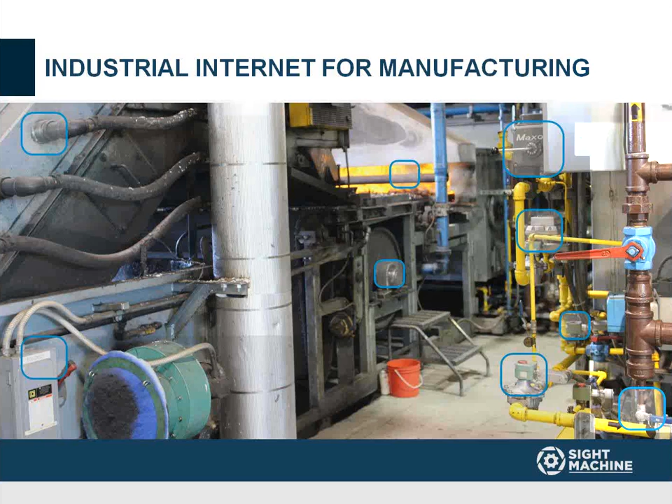That advancing wave of data producing technology has put us on the cusp of the next manufacturing revolution. And I think it's helpful to take a moment here and review how we got to where we are today. The first industrial revolution was about the rise of factories and innovation around standardized, replaceable parts. We all remember that from our grade school history books.

After that came distribution systems with the railroads and the rise of consumerization with electrification of homes and plants. And the population moved to industrial cities around the world. After that, of course, Henry Ford - he's well known as the pioneer in the next major wave, the assembly line, which was a great process improvement.

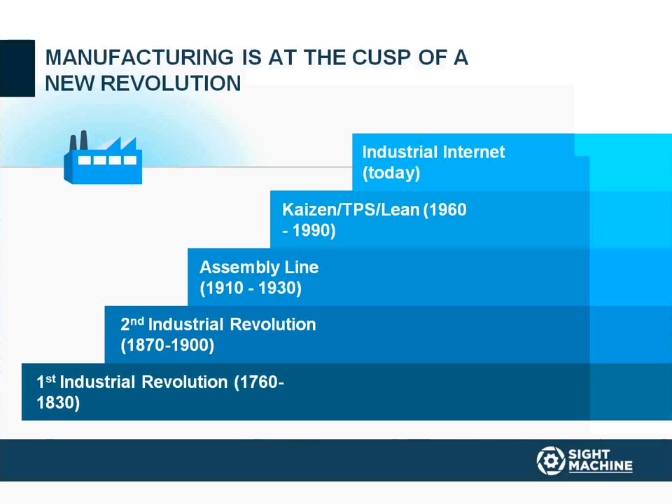And for the next 75 years or so, all of the great changes in manufacturing have come from process improvements, including the rise of lean manufacturing or the Toyota production system, and quality initiatives like TQM back in the 80s and Six Sigma more recently. The Toyota production system and Six Sigma in particular drove greater interest in the systematic use of technology and information from the factory floor, which in turn drove investments in the technology on the floor to track that information. And that's how we got to where we are today, in the rise of the industrial internet.

You might be asking yourself, if manufacturers have been investing in automation and this technology for 10 or 20 years, why is this so much in the news right now? There's a pretty good answer for that. Until the last few years, the technology and tools needed to make sense of all of this data have not really been available to most people.

Recently, however, there have been several advances in information technology that have finally brought all of this together. These advances include a brand new branch of data science, generally called big data. I'm sure you've seen this in articles and presentations, offering new tools for correlating and analyzing multiple types of data. You'll hear us talk both about structured data - that's the kind that's easily tagged and fits into a standardized database - and unstructured data, that's the kind that doesn't have a standard row-column database format and thus doesn't fit into traditional systems very well. That's things like paragraphs of text, images, etc.

Coupling these advances with the rise of standards for machine communication protocols, the ongoing investments in automation and sensors, and the rise in particular of inexpensive storage and computing power via cloud-based systems - that's how we got where we are. This is why the pieces coming together have given rise to the industrial internet, in the situation we find ourselves in today.

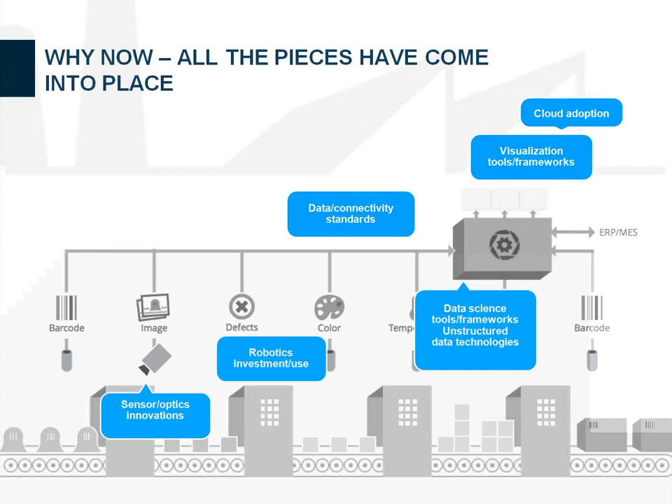And it's a good thing, too, that all of these have come together, because market forces have really fundamentally changed the game in manufacturing. All of us have heard this many times before, but looking back over the last 10 to 15 years, we see much higher quality standards, both from consumers and from our customers in our supply chain. Tighter regulatory environments, especially in automotive and medical device, and more recently in food processing, and the reporting requirements that go along with it.

There's been a very dynamic labor situation both in the U.S. and globally. Companies that offshored production for labor force costs are rethinking those decisions because costs have risen so quickly in places like China. We've seen faster cycle times for new products. Going back to automotive, I think when I was a kid, the standard refresh cycle for new automotive designs was in the 6 to 7 year time range. We're now seeing 4 years as a standard, and getting down to 3 years in some cases.

And even emerging trends like the mass customization of products are all pushing harder and harder on manufacturers. If you're not familiar with mass customization, take a look at the Nike website. This is kind of a cool thing. You can start with a basic shoe that they manufacture, and you can customize its look, anything you want, colors, patterns, etc. And in a few weeks, Nike's going to send you a bespoke shoe just to your specifications, your size, your colors, everything. Tesla's doing the same thing with cars.

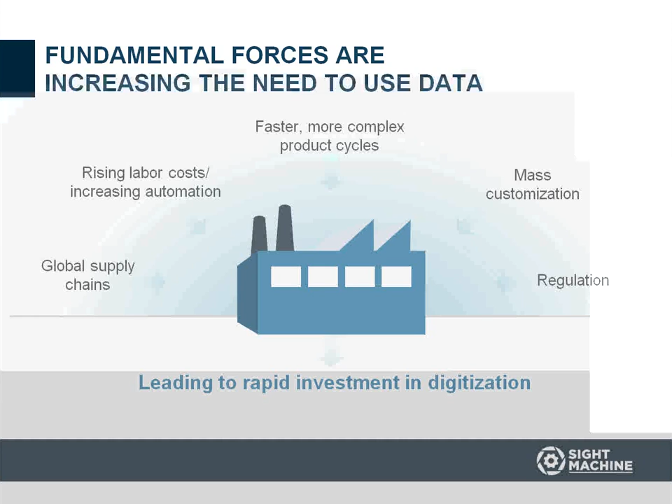All of these new pressures, all of this complexity, all land in the same place: the factory floor. Trends like the ones I just talked about are demanding new processes and new technologies and access to the data that's being produced on the shop floor. And they are really some of the key drivers for the increasing spend on new digital manufacturing technologies and manufacturing intelligence technologies as well.

I love this message, this acronym DRIP, Data Rich Information Poor, because we see this problem so often when we're out talking to manufacturers. They all seem to have the same sort of problems. They're producing data, they know they're producing it, and sometimes they're collecting it and collating it, but not in any standardized fashion. What we hear from them, and this is such a typical story, is that when they need to do some sort of analysis or report, they send a manufacturing engineer down to the plant with a thumb drive.

And he goes from system to system, collecting the data that's there, brings it back to his desk, imports it all into an Excel file, and spends a couple of days organizing it, sorting it, and creating some sort of report from it, which he then usually distributes via email. I don't think anybody's going to call that a best practice. Very few people trust that data. It's certainly not timely data, and it's not an easily replicable process. So clearly not a best practice in manufacturing.

So this DRIP acronym is a really great identifier, I think, for the problem. This lack of insight caused by being data rich and information poor creates all kinds of problems, right? So we've seen a fastener company doing destructive testing and manual visual inspections that just can't keep track of their data. We've seen an automotive OEM that has a dozen different data systems and uses interns to enter data from one system to another. We've seen a global footwear maker who started automating their entire process without thinking about all the data gathering and analysis to provide them insight into their processes.

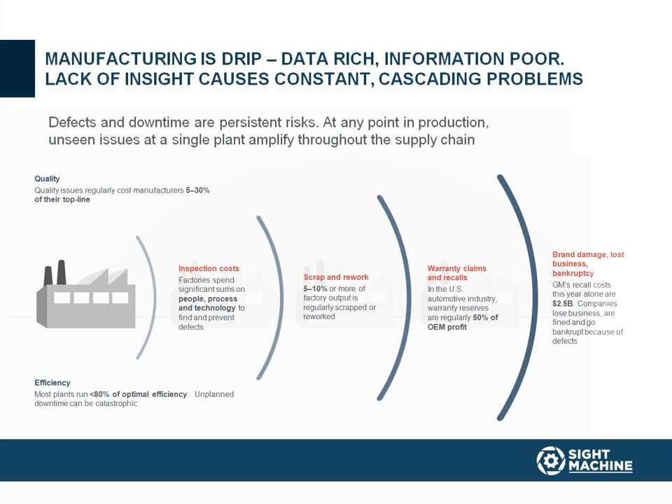So here we are, right? Your factories, we know, are generating incredible amounts of data, but most of it is sitting unused. Companies are going to spend more than $200 billion in a few years on automation technology, on machines that talk, but most of them are still not listening. They may have a very strong controls network in place in their factories, but there's no data store, no modern software layer that brings intelligent analysis to that data.

And that is where Sight Machine comes in. We're not going to talk about Sight Machine just yet, though. There's another issue that I want to talk about briefly before we move on and talk about the solution that we provide. It's a subtle thing that we haven't covered yet, but it's an important one.

There are actually two types of data that most factories are generating, with two different groups wanting access to it and using the data. We often find that these two groups don't really communicate with each other. I'm talking about parts data and process data. The quality team monitors as much data about the parts as they can get. They're looking for defects with visual inspection or machine vision systems, with digital gauges and other tools. They report out the data with control charts. They apply risk assessment and mitigation techniques up front as they're creating new process routing and supply chain solutions. And they play defense, really, against the problems that they know are going to rise up someday. So they're really on the defense most of the time.

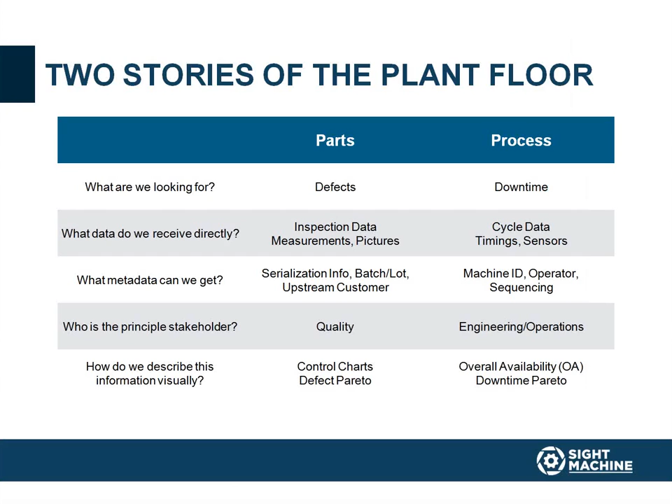The other group is engineering and operations, who are monitoring the processes taking place in the factory, right? This is what they're all about, process, process, process. Their goal is efficiency. So they monitor machine downtime, they look at cycle time, tool usage, maintenance time, much, much more. And they report things out as overall availability, or OEE is a very standard report that we see, downtime, Pareto charts, etc. The problem here is that the two types of data, the parts and process data, are really inextricably linked. They should be looked at together, but they're usually kept separate from each other until a problem occurs, and people try and dive down into it. The demand that we've talked about for a modern software layer to address the factory data challenge really needs to address both types of data, both groups' needs, and do it in a seamless fashion. So there really should be no differentiator between parts data and process data within your systems and within your factory.

Once this data is collected and it's inside our system, the middle layer, the data management layer, that engine utilizes a variety of techniques to aggregate and collate the data into usable formats. And the third layer, our applications, then presents the results of that analysis in a variety of applications supporting areas like quality, traceability, and operations, all kinds of operational insights and product insights, and it's available in real time.

From a practical point of view, the system usually includes a small industrial computer installed somewhere within the factory, and that collects and aggregates data from the sources in the factory. The server is then connected to our cloud architecture where the analysis and the applications run. That means users with appropriate permissions can log on from virtually any web browser, regardless of their location, and get real-time, up-to-date analysis of what's going on in the plant. So if you have a factory in China, for example, Sight Machine can give your operations and quality people in the U.S. real-time insight into those Chinese operations without ever leaving their offices. That is really the value of cloud computing nowadays when layered onto a factory system like this.

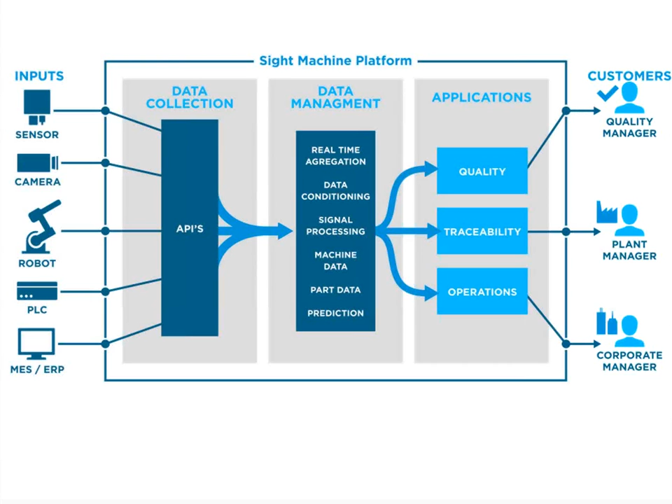And the outcomes we've seen from our existing customers are pretty remarkable. We've seen, of course, dramatically reduced scrap and rework. I mean, that almost goes without saying once you get the information about the processes. Dramatically increased OEE, that's a number that almost all of our customers are tracking. Better overall performance of their manufacturing operations is really what it comes down to. We've seen one customer wants to use the Sight Machine reports when pitching to new customers. So they're using this layer of intelligence to win new business and increase revenues for their company, which is pretty remarkable that people have that vision for really a manufacturing intelligence system.

The platform was designed to be very scalable. We can start with a single machine or a single cell within your operations, and scale across an entire factory, across multiple factories, pretty seamlessly and easily.

The architecture combines some open platform resources, cloud-based resources, the big data science I talked about earlier, and software as a service for the applications to solve these recurring problems in manufacturing. So the data we collect is transformed into usable models and real-time analytics, including time-based models and structured

models, looking for outliers and shifts. There's all kinds of reports and reporting structures we can look at, including outputs and applications like OEE, very popular in our customer base. Component checks, predictive and preventive maintenance are very big. Root cause analysis, of course, tying together root cause with the material identifiers for true traceability. Supply chain correlations is another output and report style that we look at.

And more are looking at green initiatives as well. Companies that want to track energy usage, both for a costing model and for corporate green initiatives, energy utilized during different times of day. We've seen some larger manufacturers who have negotiated contracts so power is less expensive for them in the evening or overnight hours rather than during standard work days.

There is one customer I'm going to talk about today with a little more specific detail. I can't give you a whole lot of detail, or any identifying information about the customer, except to say it's a big automotive OEM. They started working with us this past year to tackle a very difficult quality problem in one of their factories, a problem that resulted in millions of dollars every year in warranty claims. It was a big issue for them that they were throwing a lot of resources at.

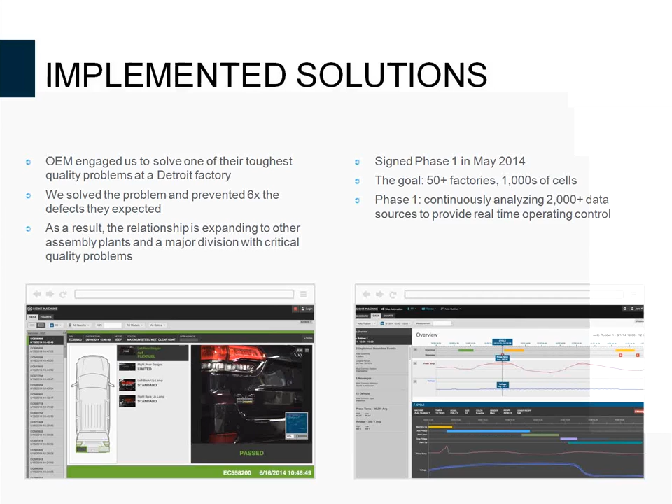The analysis we provided in real time on their line ended up catching 6 times more of the defects than they expected, a huge cost savings for them. So now we're looking at moving to the next phase of the relationship, more plants, more problems to tackle, and overall more savings for them and happier dealers and customers with fewer warranty claims. That really is a good snapshot of what Sight Machine does for our customers.

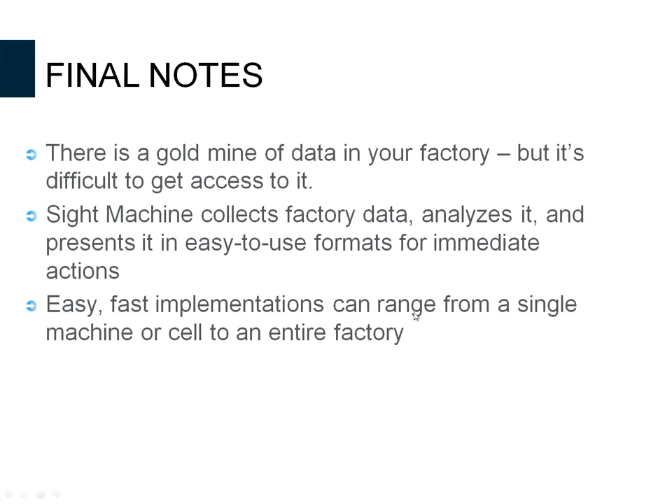We didn't talk much about implementations today, but because of our hybrid on-prem cloud architecture, we can do pretty straightforward and fast implementations for a single machine or cell, and then scale to an entire factory very quickly. So that's what I want you to take away from this today. When you think of Sight Machine, think of that architecture, think of factory data, and think of immediate actionable reports for yourself.